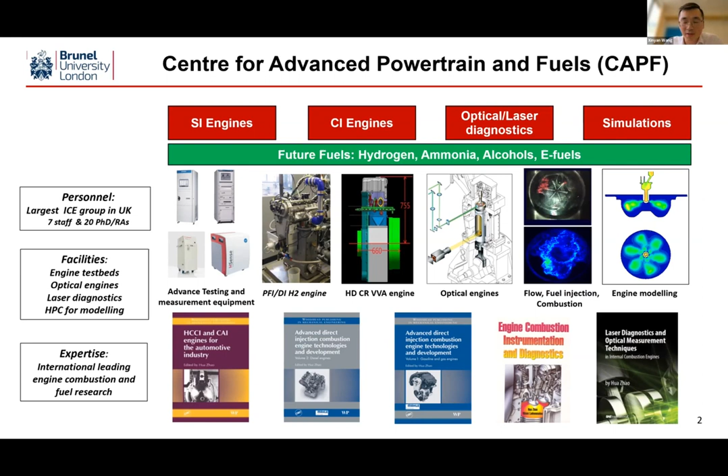So today I'd like to cover three topics. The first one will be the challenges and opportunities of moving towards net zero for the transport sector.

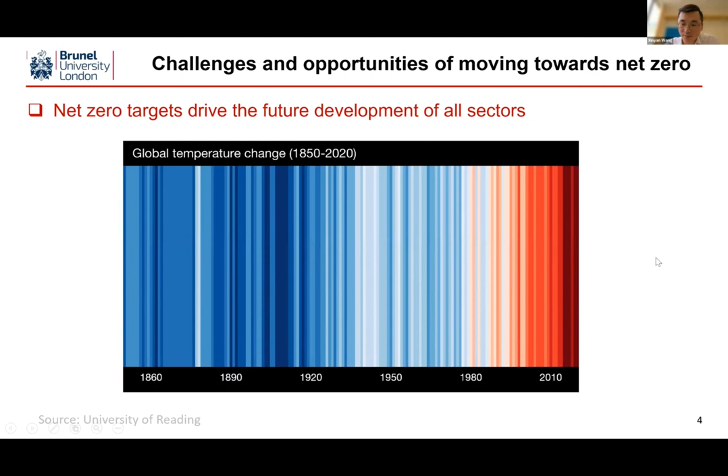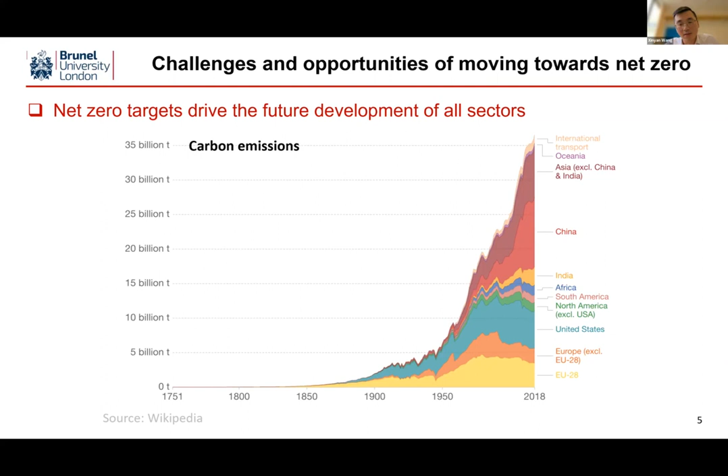This graph shows the global temperature change over the last 200 years. Obviously, in the last almost 50 or 40 years, we see a significant increase in global temperature, and this increase is highly related to carbon emissions. It's clear that in the last 100 years, CO2 emissions or greenhouse gas emissions have increased significantly. In order to mitigate the global warming impact and reduce CO2 emissions, the UK government has implemented a very ambitious target: by 2050, we are aiming to achieve net zero.

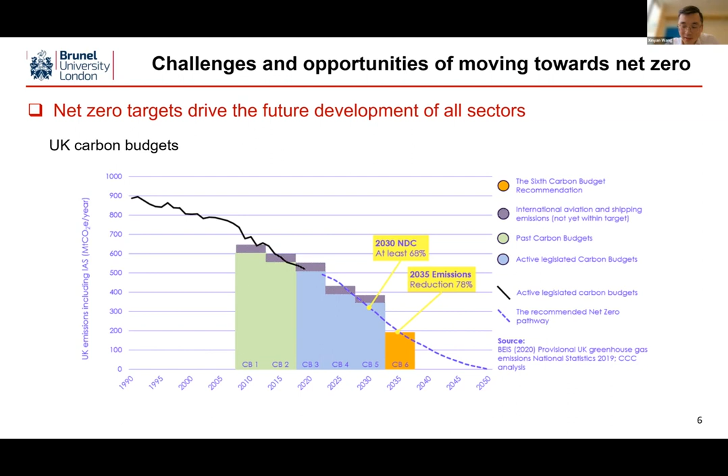The government has also set intermediate goals. For example, by 2030 we have to reduce carbon emissions by around 70%, and by 2035 the carbon reduction target would be around 80%. These are very ambitious targets, but decarbonizing is not straightforward. For the transport sector, it currently accounts for around 27% of carbon emissions.

We have alternative propulsion systems to decarbonize the transport sector, for example electric vehicles, and we do see a significant increase for light-duty or passenger vehicles. Here I show the sales data from 2021. For battery electric vehicles and hybrid systems, there's a significant increase, almost 60%, and for mild hybrids it also increased significantly, almost 65%.

But if we look at the categories of this data, we find that the increase of pure battery electric vehicles is only about 12%, which means almost 88% of vehicles still have combustion engines burning fossil fuels.

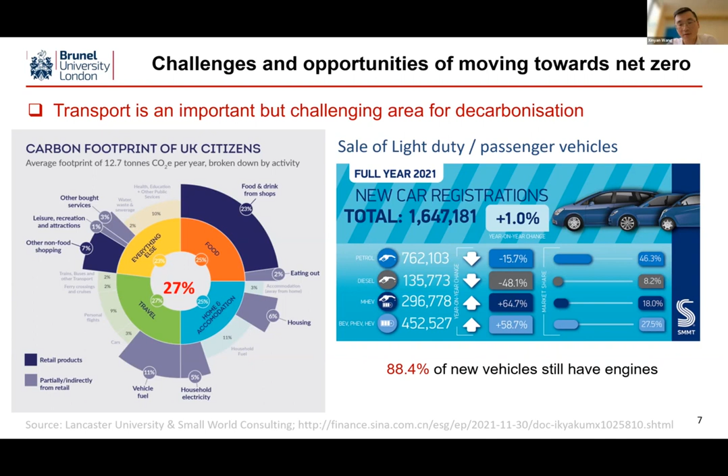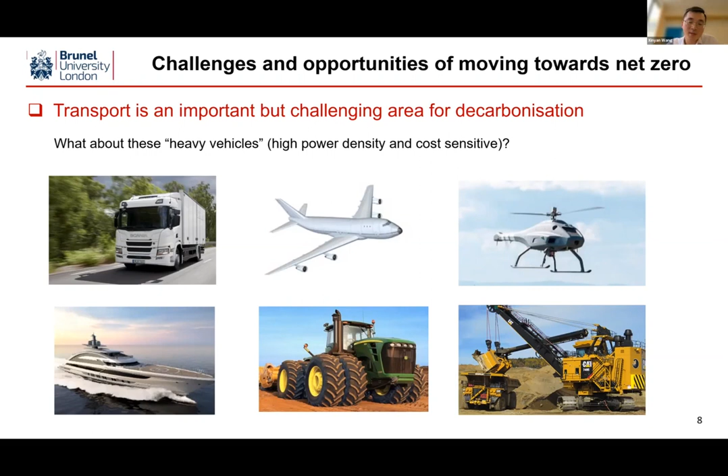It's even more challenging for heavy vehicles, for example heavy goods vehicles, aviation, light aircraft, marine sectors, agriculture vehicles, and other machinery vehicles. Because they are heavy, they need a higher power density propulsion system, and they are more cost sensitive, so we have to consider both the cost of the vehicle and the operating cost.

If I summarize the challenges into this graph, obviously for fuel cell and battery electric vehicles, they will be gradually increasing their market share, but we have to recognize that currently they still have a relatively lower market share.

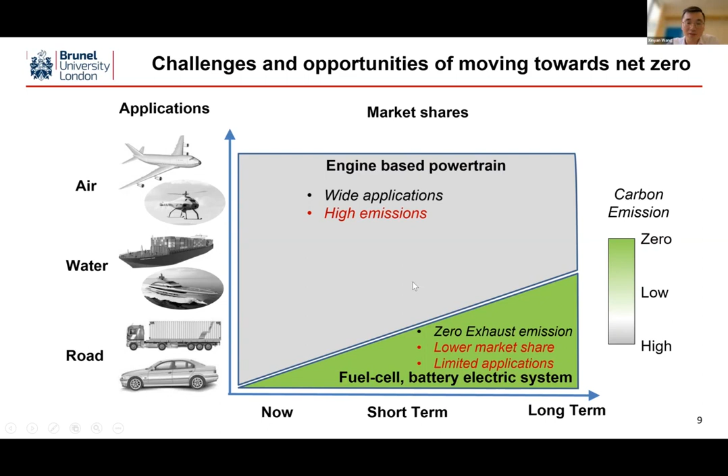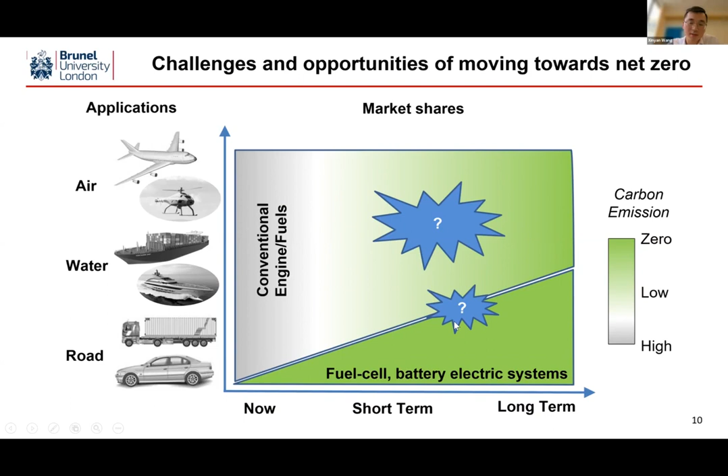So the question would be, first, how can we develop the technology for these heavy vehicles? And secondly, is there any possibility we can increase the market share or the increasing rate of the market share for fuel cell or battery electric vehicles?

So I think there are great opportunities here. First, if we look at the fuel used by fuel cell, obviously there are hydrogen-based fuels, whether it's pure hydrogen, ammonia, methanol, or any other e-fuels. Secondly, battery electric vehicles obviously use electric systems. And in the last 100 years, engine technology has been significantly developed, so we have a lot of advanced engine technologies which can be used for future low carbon or zero carbon propulsion systems. So we do see a good combination here. If we can integrate the three elements - hydrogen, electric systems, and optimized engines - we'll be able to find good solutions for these transport sectors.

And also with the increasing usage of hydrogen and increasing usage of electric system batteries, this will boost the development of infrastructure for hydrogen as well as battery electric. So we'll be able to increase the usage of fuel cell technologies and battery electric systems in order to achieve a real net zero society.

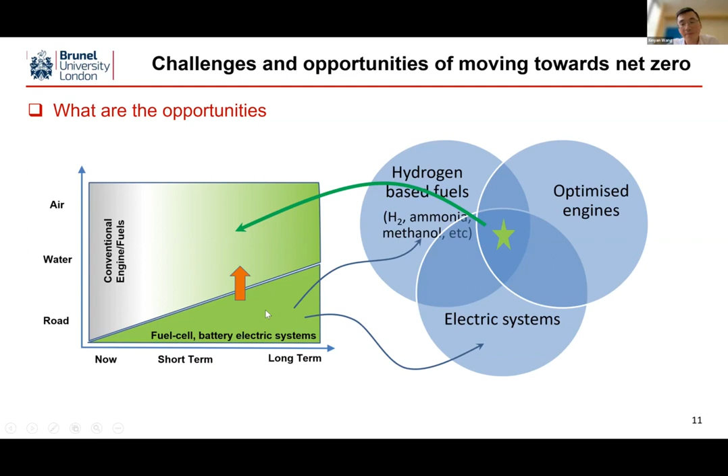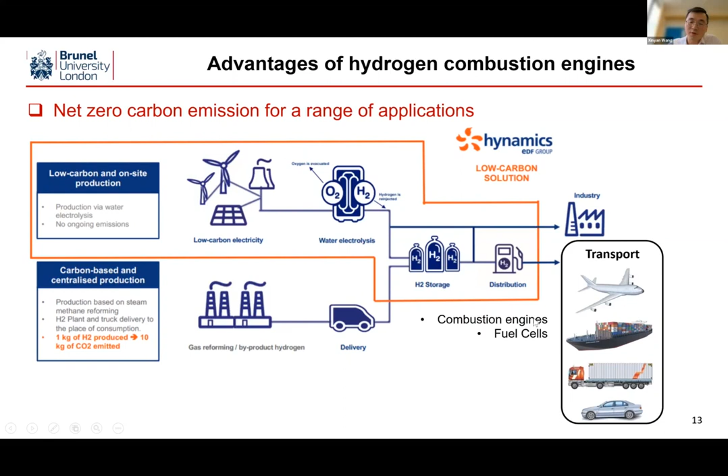So the second part will be the advantage of hydrogen combustion engines. As mentioned, hydrogen is always a zero carbon fuel or energy carrier. Currently, much is produced from fossil fuel, but if we capture the CO2, we'll be able to produce hydrogen without carbon emissions. In the long term, the target would be to use renewable energy to produce hydrogen, and it can be stored and distributed for usage in industry as well as in the transport sector through combustion engines or fuel cells. Here at Brunel, we look more at hydrogen combustion engines.

There are several advantages. First, the carbon emission obviously will be zero, and secondly, the engines can use low purity hydrogen. This can significantly reduce the hydrogen production cost. Also, the combustion engine can make use of existing engine design and hybrid electric architecture, and it will significantly reduce the production cost of the propulsion system. The cost will be very similar to existing diesel or natural gas engines.

Also, the hydrogen engine efficiency will be more or less the same as current diesel engines. Once we develop a dedicated hydrogen engine, the efficiency will be around 50%. In terms of performance, it has excellent instant cold start and shutdown performance, so it is very feasible for powering vehicles. In terms of emissions, people are worried about NOx emissions because it does have some NOx emissions, but by using advanced engine technologies, which I'll mention a little later, we'll be able to achieve near zero NOx emissions. In terms of durability, it will be quite similar to existing natural gas engines, and the development of hydrogen combustion engines will protect the existing engine infrastructure, fueling system, and maintain the employment of engine engineers.

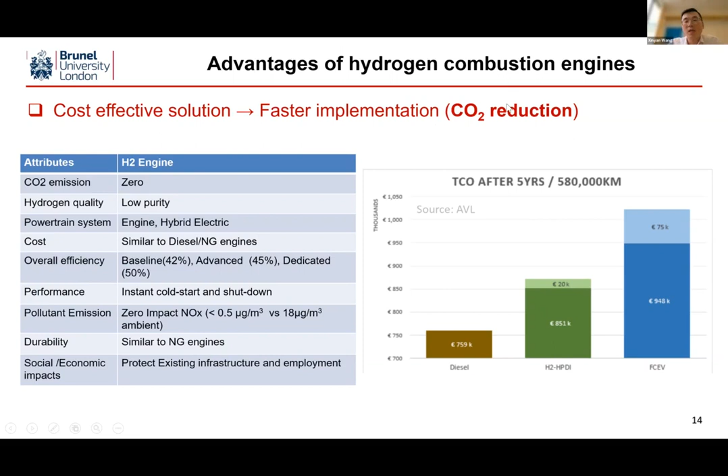In the third part, I will discuss a few combustion engine technologies suitable for hydrogen engines. Once we want to develop a hydrogen combustion engine, we have to recognize the difference in fuel properties - hydrogen is a unique fuel.

First, the laminar flame speed is quite high compared to other fuels. Secondly, hydrogen has a much wider flammable range, as shown in this graph - hydrogen can burn from 5% to 75% mixture. And thirdly, the hydrogen ignition energy is minimal compared to other fuels, which means hydrogen can be easily ignited. So we have to recognize the unique properties of hydrogen when we develop hydrogen combustion engines.

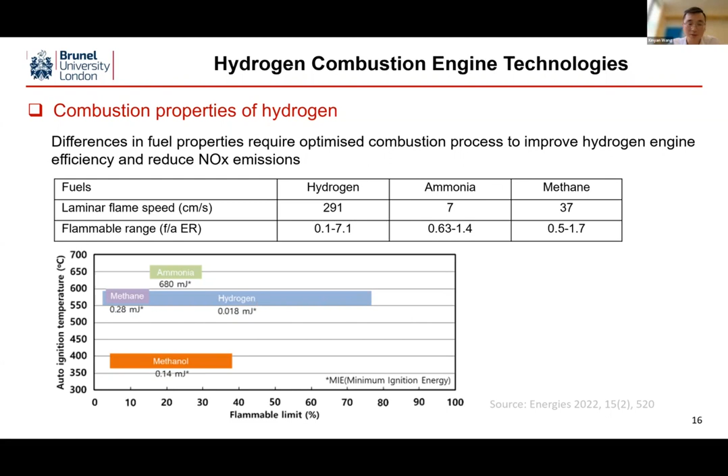So the first point I want to discuss is a fuel supply method. We can make use of existing spark ignition gasoline engines or compression ignition diesel engines to burn hydrogen. The easiest way is to retrofit the engine with a port fuel injection system, which can be achieved with minimum cost, but there are a few downsides because of the unique properties of hydrogen.

First, it will displace a lot of space if we inject the hydrogen into the intake port, which reduces engine power output. Secondly, because of the lower ignition energy, we may get some backfire in the intake system, and we don't want that risk.

The second technology would be direct injection. Instead of a port fuel injector, we modify the cylinder head to have a dedicated direct injector, injecting all the fuel into the combustion chamber so we can avoid any backfire. Also, we can maximize the usage of the intake airflow to improve engine power performance. But we need to develop a dedicated cylinder head, which increases the cost of the engine.

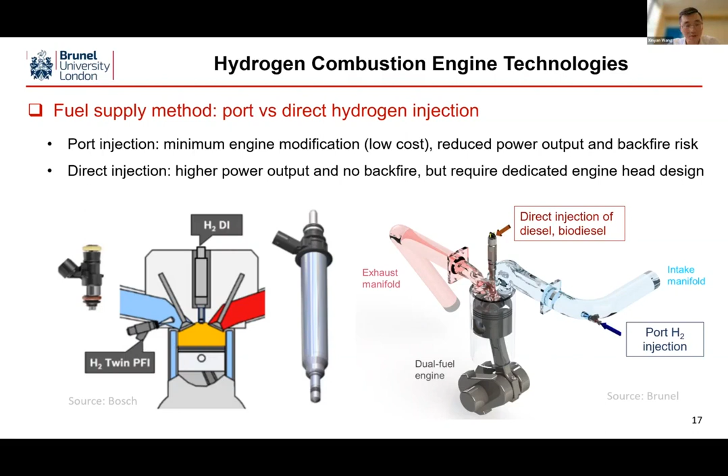The second aspect I want to discuss is combustion mixture preparation. We can keep running the engine with the stoichiometric condition. This has several advantages: first, we'll have much better power performance and transient engine operation, and we can make use of an exhaust gas after-treatment system, for example in gasoline a three-way catalyst, but it does produce a lot of NOx emissions.

Alternatively, we can run the engine at a very lean condition, and there we can increase the engine efficiency. Secondly, we'll be able to reduce combustion temperature, which will reduce NOx emissions a lot.

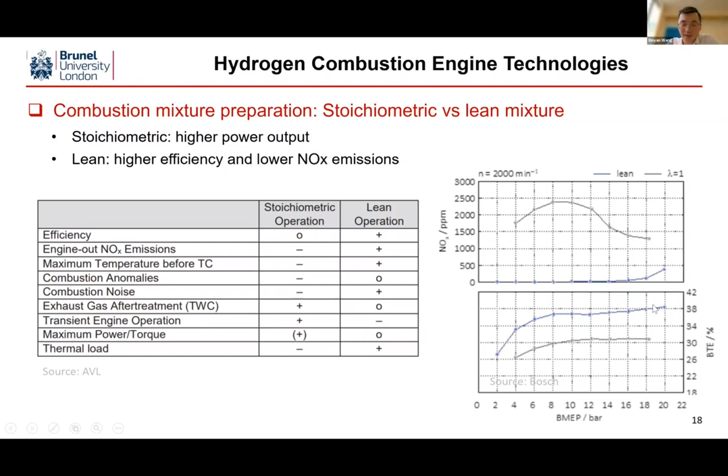The right graph shows data from Bosch. When we run the engine at low load and medium load conditions, the NOx emission is almost zero compared to the lambda one case, shown with the grey line. When we increase the load, the NOx emission increases, but it's still quite low. Also, the efficiency has significantly improved when we run lean condition.

The last point I want to mention is integration with hybrid systems. When we use a hydrogen engine plus hybrid, first we'll have higher energy density of hydrogen, meaning longer mileage, and it can eliminate or reduce external charging, increasing flexibility, which is quite important for heavy goods vehicles.

Third, load leveling. Basically, we don't run the hydrogen engine at full engine speed and full load condition. We can use the electric system to assist low speed, low load, and high load conditions, then only run the engine at certain load conditions to further improve engine efficiency.

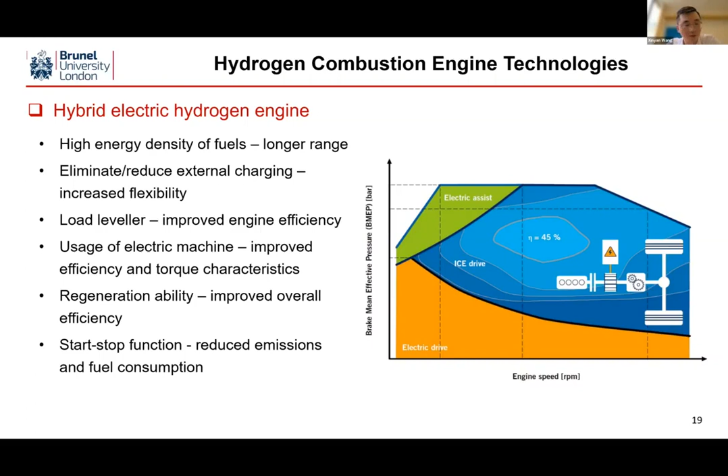Also, by using an electric machine, overall the efficiency will be better and torque power performance can be better. For some vehicles, they can use regeneration ability, for example to recover energy from braking, and also the start-stop function to further improve system efficiency and reduce fuel consumption.

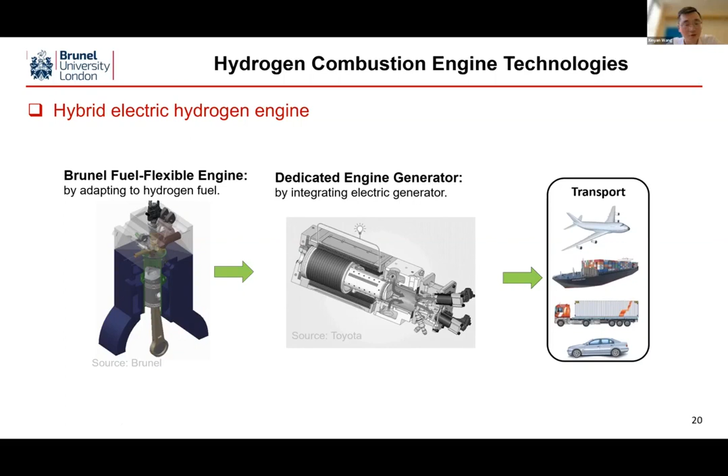In the last four or five years, Brunel has developed our own fuel flexible engine, which can run hydrogen fuel as well. It is a dedicated two-stroke engine with very high power density, so it can easily be converted to a dedicated electric generator, which can be easily scaled up for different applications. In that sense, it is just a dedicated generator for electric vehicles.

So I'll summarize my talk. Hydrogen combustion engines can make use of existing engine technologies and have less requirement on hydrogen purity, therefore becoming an important solution for carbon reduction in the transport sector.

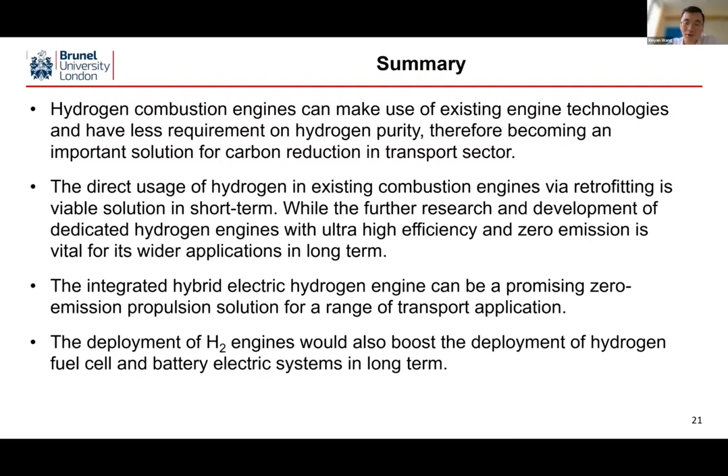The direct usage of hydrogen in existing combustion engines via retrofitting is possible in the short term, while further research and development of dedicated hydrogen engines with ultra high efficiency and zero emission is vital for its wide application in the long term. The integrated hybrid electric hydrogen engine can be a promising zero emission propulsion solution for a range of transport applications, and the deployment of hydrogen engines would also boost the deployment of hydrogen fuel cell and battery electric systems in the long term.

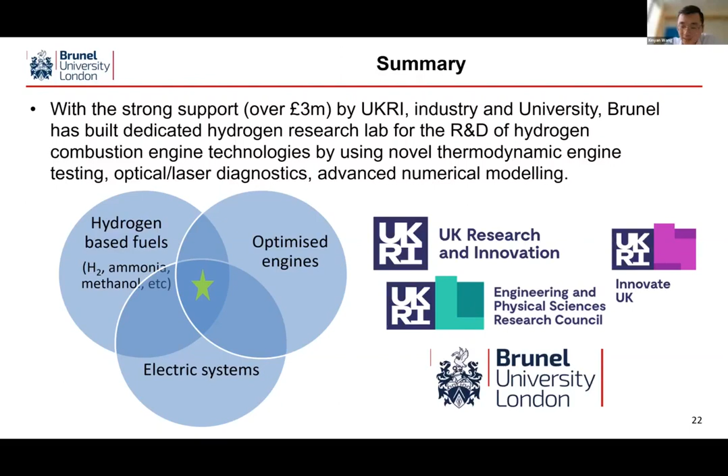With strong support, we received over £3 million from UKRI, industry, as well as Brunel University. We have built up a dedicated hydrogen research lab for the R&D of hydrogen combustion engine technologies using novel thermodynamic engine testing, optical laser diagnostics, and advanced numerical modeling. And that's all, thank you very much.